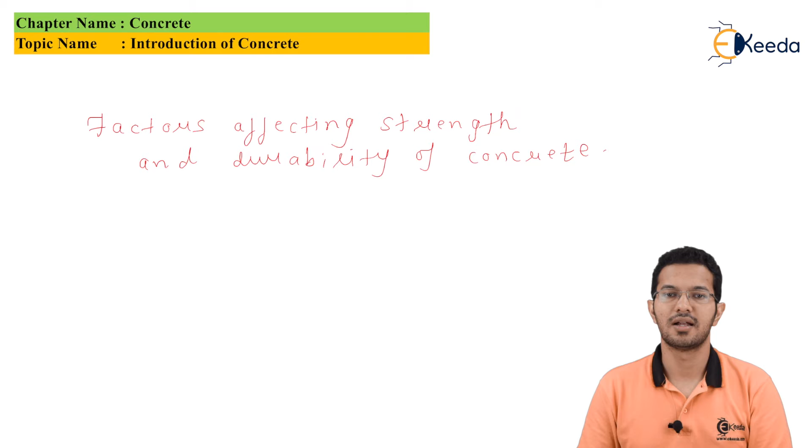In the manufacturing of concrete, we have different processes. We will also discuss destructive and non-destructive testings done on concrete materials to ensure strength, and some admixtures that are added to concrete to enhance its performance.

The construction of any structure needs some materials that may be steel, concrete, timber, aluminum, or any other material. But concrete is a very important material because it is easily available. The room in which you are studying this topic is highly probable that it is made up of concrete. Concrete is a composite man-made material and is the most widely used construction material in the construction industry.

It is a mixture of binding material such as lime or cement, well-graded coarse and fine aggregate. It also has water and some admixtures. Most ancient structures and historical buildings had been constructed with lime concrete. But with the invention of cement, the use of lime concrete is limited to making concrete foundations and roof terracing. The production of good concrete is found difficult.

Now, the question comes in mind, what is good concrete? In short, we can say that good concrete is one which is having enough compressive strength and good workability.

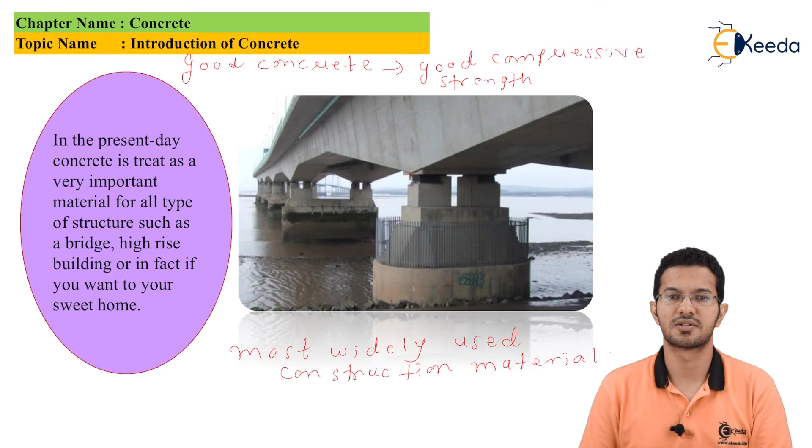In a fresh state, the consistency of the mix should be such that it can be compacted by desired means without excessive efforts, and the mix should be cohesive enough for the methods of transporting and placing so as not to cause any segregation. In hardened state, satisfactory compressive strength and adequate durability is required.

The history of making concrete started with the Romans. They used concrete around 2000 years ago, but that concrete was not the same as we use today. They made concrete with a different formula. Their concrete was not as good as the modern concrete. They made some marvelous structures like the Pantheon and the Colosseum, which have survived for centuries.

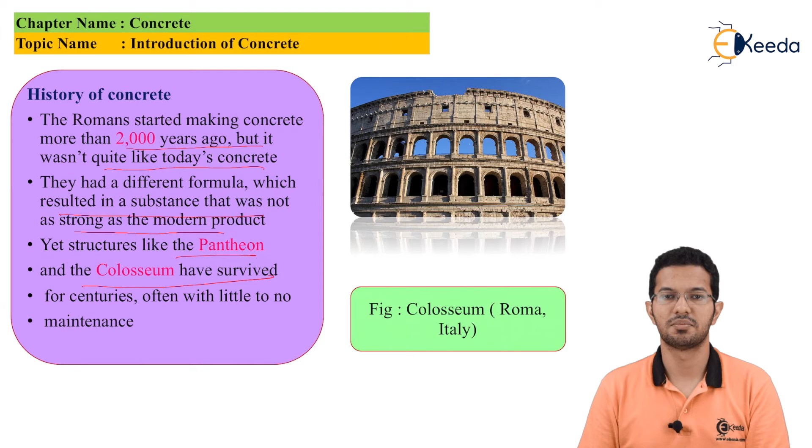No great maintenance was required for these structures, and yet these structures have survived. We can see in the figure that the given masterpiece is the Colosseum in Italy, made with Roman concrete.

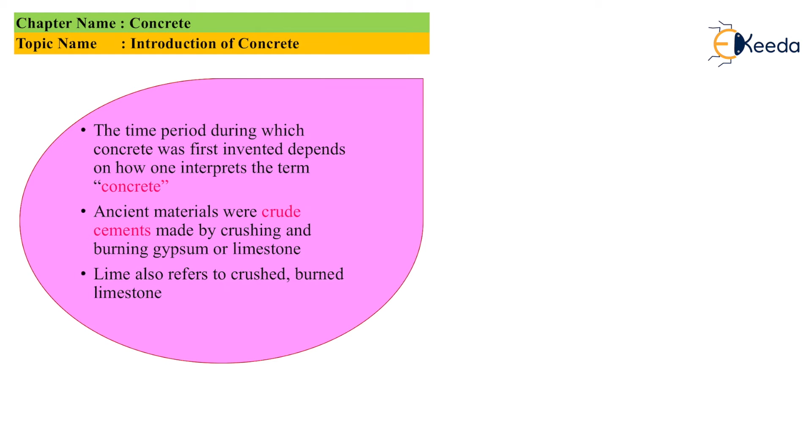There is no specific timeline for the invention of concrete. The time period during which concrete was first invented depends on how one interprets the term concrete. The ancient materials were crude cements made by crushing and burning gypsum or limestones. Before the invention of cement, lime was used in making concrete as a binding material. Lime was obtained from crushed or burnt limestone.

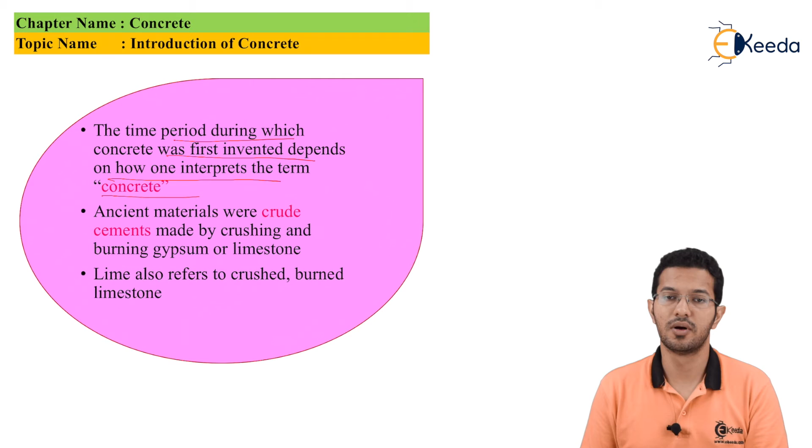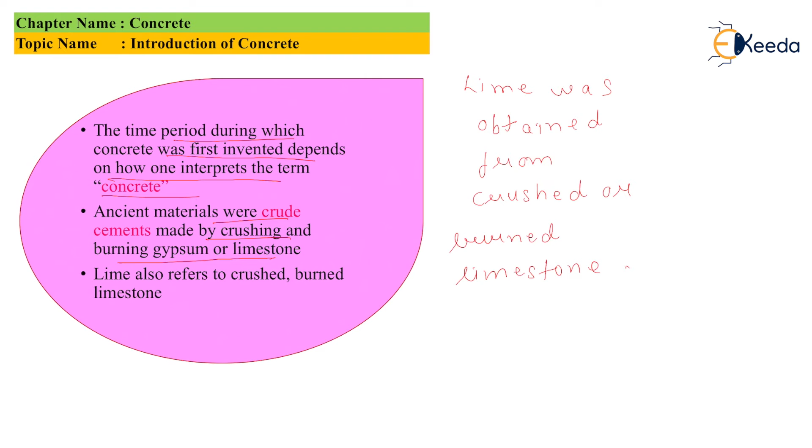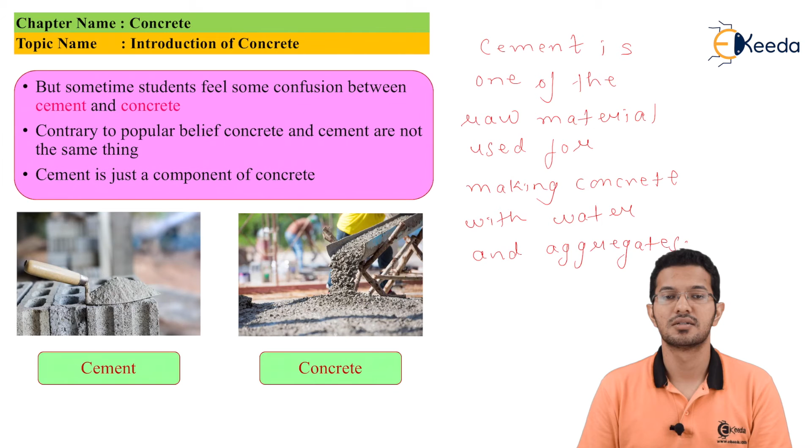Sometimes students feel that cement and concrete are the same thing, but they are not. Cement is one of the raw materials used for making concrete with aggregates and water. Admixtures can also be added in special cases where high performance of concrete is required. So let's not get confused between cement and concrete, as cement is just a component of concrete.

Concrete can be of Portland cement or lime cement. If Portland cement is used, then concrete is called Portland cement concrete or simply cement concrete. And if lime cement is used, then the concrete is called lime concrete. Lime concrete is obsolete as cement concrete has better strength and durability properties compared to lime concrete.

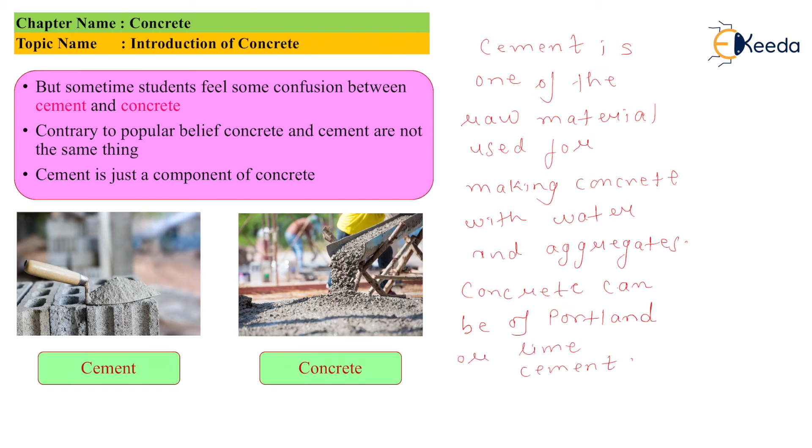We will discuss about the making of concrete right now. There are three basic materials used for making concrete. They are water, aggregate, and Portland cement. Aggregates may be coarse or fine aggregates.

Now, let's look at water. Mixing water should be free from impurities and the pH value must not be less than 6. The excessive impurities may affect the setting time, strength, durability, and also may cause efflorescence, surface discoloration, and corrosion of steel. Now let's look at aggregate.

These are the materials basically used as filler with binding material in the production of concrete. They occupy 70 to 80% of the concrete volume. Therefore, they exert considerable impact on the characteristics and properties of concrete. Portland cement acts as a binder to the aggregates. Cement, aggregate, and water are mixed in definite proportions to make concrete.

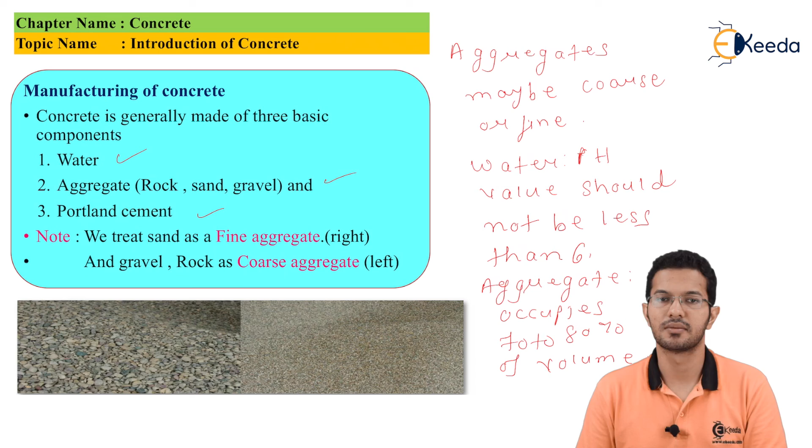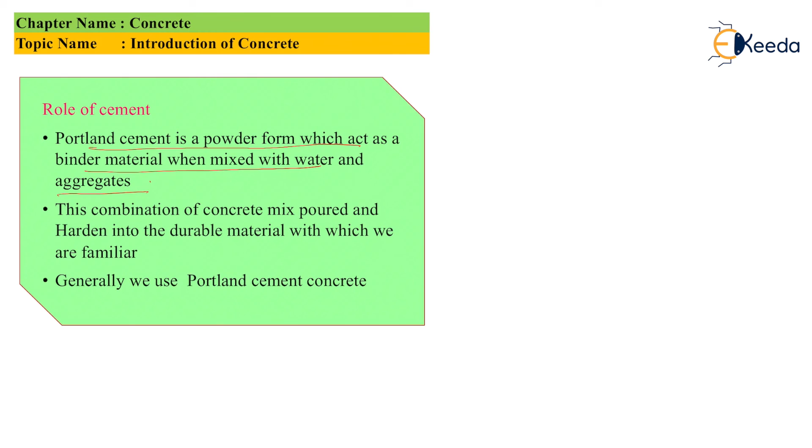Now, let's talk about the role of Portland cement in concrete. Portland cement is in powder form, which acts as a binder material when mixed with water and aggregate. Cement, when mixed with water along with aggregate, gets hydrated and hardened into a durable material, which we are already familiar with. For normal construction activity, we use Portland cement concrete.

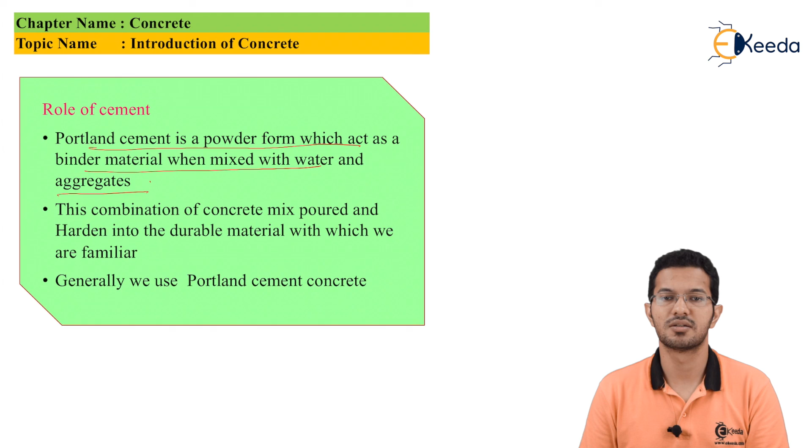When cement, sand, and water are mixed in definite proportions, they make mortar. Mortar is a plaster-like material used to adhere stones or bricks with each other. The difference between mortar and concrete is that mortar is made up of cement, sand, and water, but concrete is made up of cement, sand, water, and coarse aggregate.

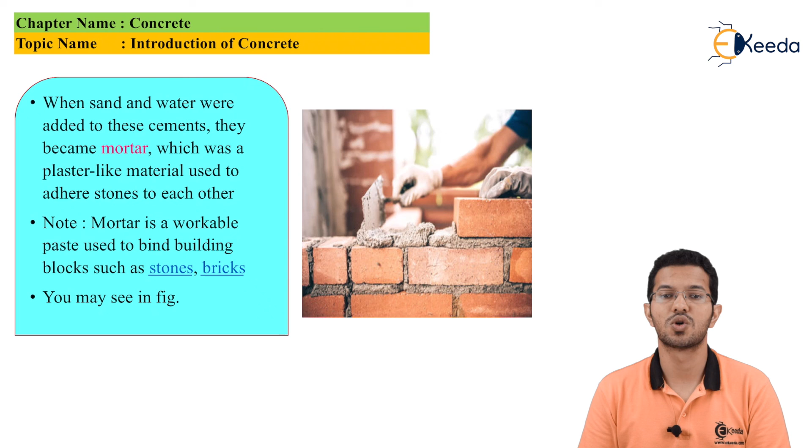In the modern era, the form of concrete we are seeing is not made at one time, but it is a result of continuous progress over thousands of years. During this period, materials were improved, combined with other materials, and morphed into modern concrete. Today's concrete is made using Portland cement, coarse aggregates and fine aggregates of stone and sand, and water.

So, the introduction topic to concrete is completed. In this topic, we have learnt about the difference between cement and concrete, making of concrete, and the role of cement along with the history of concrete and mortar.